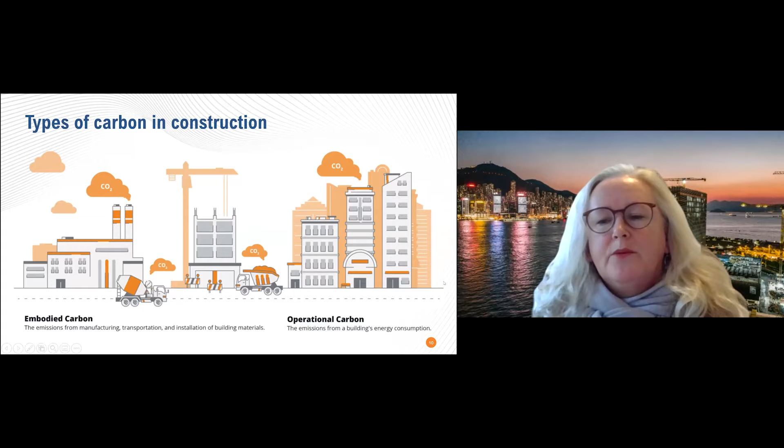And I'm going to talk about two parts of the carbon equation. One is the embodied carbon, which is all the energy and the carbon wrapped up in the materials through raw material extraction, manufacturing, processing. And the other side is the operational carbon, which is probably more familiar for most of you, the energy being consumed in buildings or indeed within infrastructure.

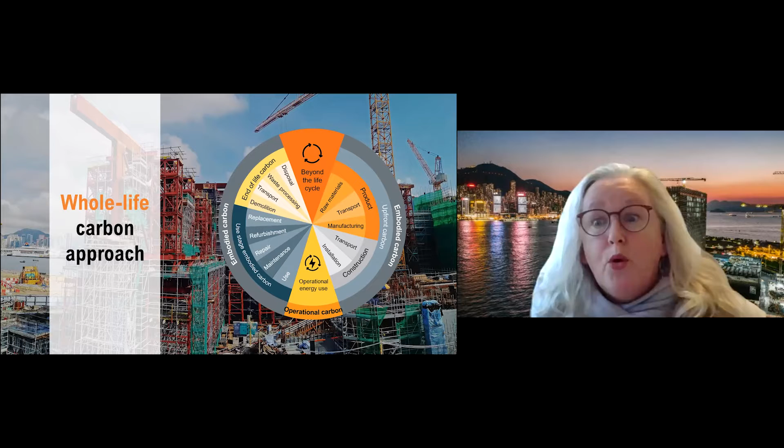And the thinking now is very much about whole life carbon. The outer grey circle you can see there is the embodied carbon piece. And the issue is that traditionally the focus has been a lot on operational carbon, but the grid electricity is decarbonising, and the embodied carbon part is becoming much more important and more of a challenge to decarbonize.

From the construction aspect, we call the first part that we're focusing on in terms of mitigation the upfront carbon, and that is two aspects. If my mouse will work, here we go. We've got the materials embodied carbon, as I mentioned, and the carbon from construction activities. So this is what we're actually doing on site and the energy that we're using in the transport and also the activities on the projects.

A little bit of context then is the World Green Building Council vision for carbon reduction, and they have two milestones. I'll make these a bit bigger. 2030, they expect to see 40% less embodied carbon with significant upfront carbon reductions, and all new buildings must be net zero operational carbon. That's a real challenge for Hong Kong with our very high-rise, high-density development, subtropical climate, and reliance on air conditioning.

For 2050, everything should be net zero carbon, whether it's the embodied carbon or the operational carbon, and that in theory should be new and existing buildings, as well as infrastructure.

And I think there's a lot of discussion on green building operation, but we don't tend to talk too much about the infrastructure side. And from a construction perspective, the embodied carbon wrapped up in infrastructure, things like roads and highways, that's the majority of the carbon that we've got to try and mitigate. So certainly a challenge. So I'm going to talk about it in four aspects. So these are the key players, I'd say, the key groups of players in the construction sector that can influence that upfront carbon. I'll focus obviously more on the contractor because that's what we're doing, but I'll touch a little bit on the other areas.

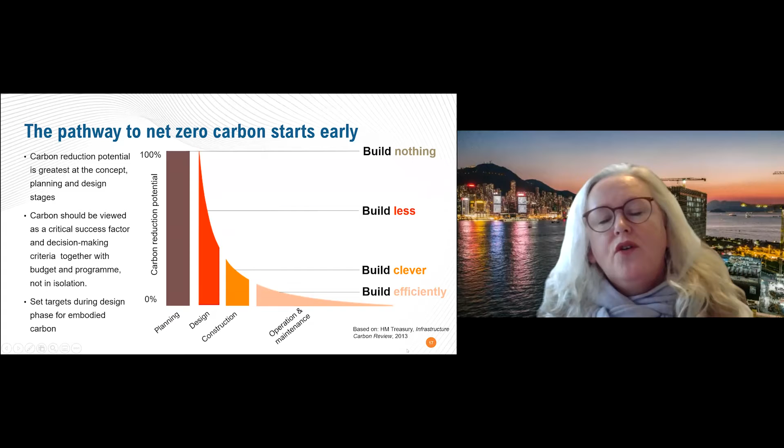And I think this graph is important because it highlights that the biggest opportunities for carbon reduction happen at the very beginning of the project. So at the planning and design stage, you get the greatest potential for carbon reduction. And some countries are setting targets for use during the design stage to try and push down the embodied carbon for projects, and to take a life cycle approach, whole life and embodied carbon thinking. We can't just look at the operational carbon anymore.

And I think some of the clients are already doing this, to integrate low carbon specifications into contract procurement, and to engage with the contractor during the early stages of the project, and even during design. The client can also set the design life, so a longer design life will ultimately reduce the embodied carbon of the overall project, and perhaps specify that the building should be flexible for adaptation, and it should be designed for disassembly so that you can get the maximum use out of the materials for recovery. So these are the roles that

the proponent can play. From a designer's perspective, this is where there's the opportunity for optimizing the design to reduce the amount of materials that are used, and to specify lower carbon materials. You can see here's a couple of pictures. These are void forms for concrete pours to reduce the amount of concrete used, or using, for example, the AAC blocks instead of concrete blocks in walls. And the lighter the structures are, the less foundations we'll need, and this will have a major impact because diesel used in foundations is one of our biggest challenges to reduce the carbon of.

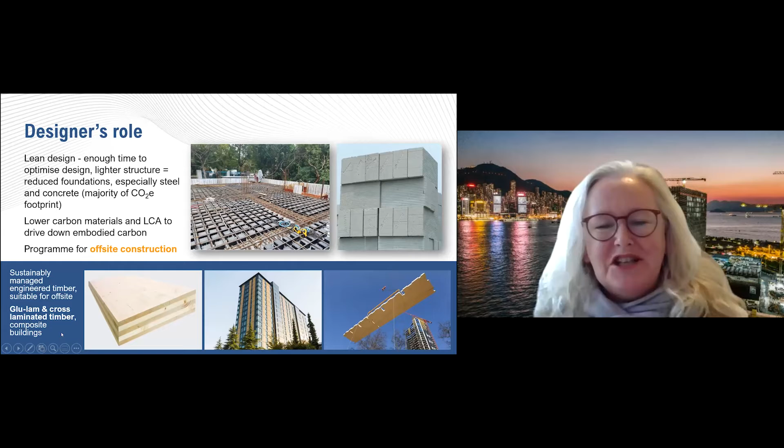Lower part of the picture there, you can see the opportunities for timber use, mass engineered timber, that would be fantastic to see in Hong Kong. Not an easy thing to bring to Hong Kong, but we hope to see this in the future.

And then on to us as the contractor then. What is our role in all of this climate change mitigation, and what have we been doing? So our carbon reduction progress so far has been pretty good. We've been reducing our carbon intensity over the years, but also our absolute carbon has been reducing. And we're in line or ahead of the targets that were set by the Hong Kong Construction Association a number of years ago. But you know, this is really focusing on scope 1 and 2 emissions. And what does that look like for us?

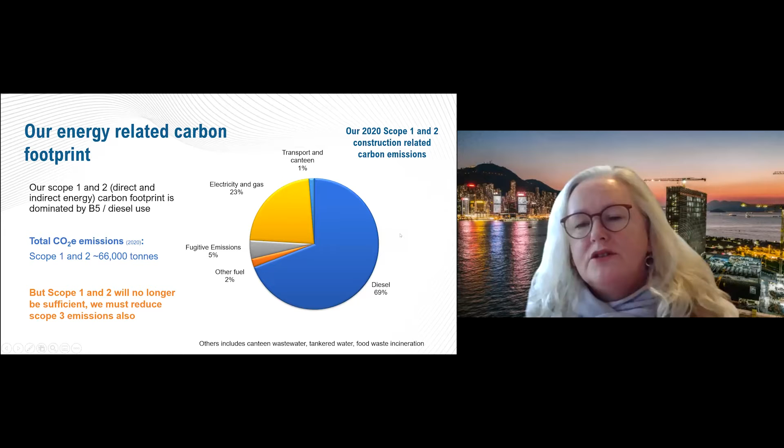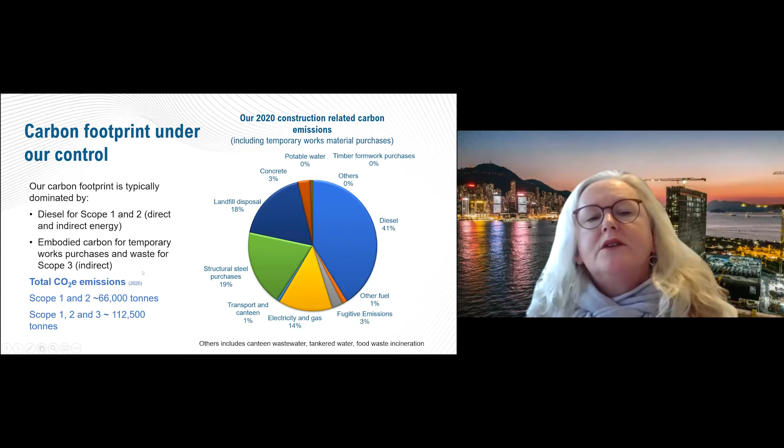We've got to be looking at scope 3, and our starting point is really where we can directly control those scope 3 emissions. So that includes things like waste and water use, but importantly for us, it's the temporary works. So these are the works that we would need to do in order to build the project. We will put up things like formwork or steel struts in an excavation, and then we'll take those away afterwards. And those are the things that we can influence. Then you've got the permanent works. Permanent works is the finished asset, whatever we're building. So it's the embodied carbon for the temporary works that we can potentially more directly control, and that's where we've got to focus our energy.

But the situation is that around 90% of the upfront carbon is in the embodied carbon in the permanent works materials. Our part that we can directly control is only around 10%. So a big challenge for us all to try and tackle that. When it comes to delivering the projects on site for the construction stage, then what do we need to do? Well, we need to work and collaborate both with our clients, project proponents, as well as the designers upstream, and we need to influence our supply chain downstream.

Directly, we need to make sure we're reducing our scope 1 and 2 emissions, so using less or lower carbon energy sources, and then delivering efficiently. So the primary objectives are things like using the technology, using digital twins, digitally rehearsing the delivery of projects, the building of projects, and off-site construction.

Those two things are going to give us a big advantage in terms of making sure that we're not doing rework, making sure that designs are all coordinated, and we're producing them efficiently off-site in factories where we can control the environmental management much more easily. Also, the construction methods. So that was the temporary works I mentioned, and I'll give you some examples of those. Waste and water management, very important, and finally, with our off-site partner factories, is making sure that they are managing their environmental impacts and using low carbon energy, these kinds of things.

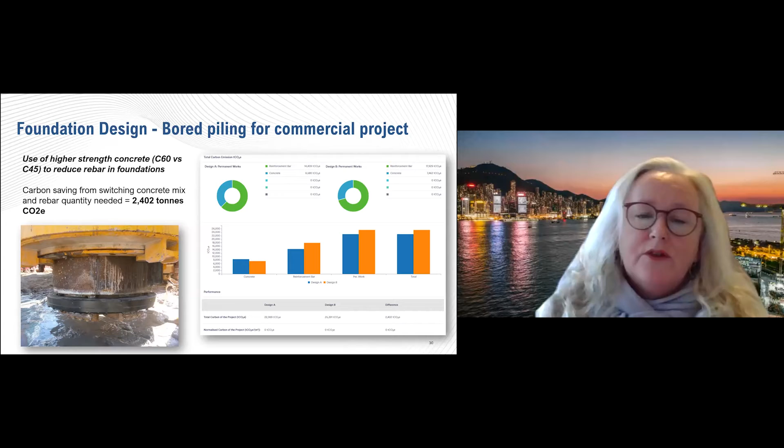We can do alternative design for foundations, and we use the CIC, the Construction Industry Council's carbon assessment tool to optimize things like the concrete mixes. So we use a higher strength concrete and reduce the amount of reinforcement bars that we're using. And that can give us carbon reductions for embodied carbon.

And another example of how we've changed the method for construction. Here we're doing a bridge, and in order to build those foundations, we've had to excavate some of the marine sediment. And the idea was that marine sediment would have been disposed of in a marine site. We've chosen to make sure we stabilize and reuse that material directly on site. And not only to stabilize it, we also are reducing the amount of cement that's needed in order to do that. So yeah, nearly 2,000 tons of embodied carbon emissions saved there to change the treatment method and trial lower cement mixes. Hope I'm not getting too technical.

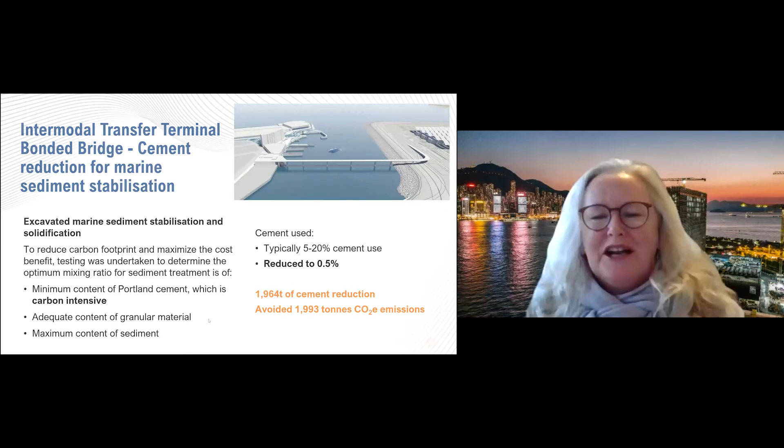We still rely on timber, particularly for formwork when it's an untypical construction, things like a podium for a high-rise residential building. And when we do use this, we make sure that it is sustainably certified. Obviously, this also can reduce the carbon footprint.

And I mentioned this carbon assessment tool. So this is a free tool that designers can use, that contractors can use, to assess different design options when it comes to the materials. And this is all updated with the most relevant embodied carbon emission factors for different types of materials used in the construction sector. And it also allows contractors to record their upfront carbon emissions, the construction part of that upfront carbon. So a great tool there. We actually helped advise on that one.

And then we come to the BIM and offsite, so the building information modeling, breaking things down and coordinating them for shop drawings. You can see for the factories. This is a typical example of what we've been seeing in the industry, these modular integrated construction units. Unfortunately, these are at Penny's Bay, an unfortunate necessity.

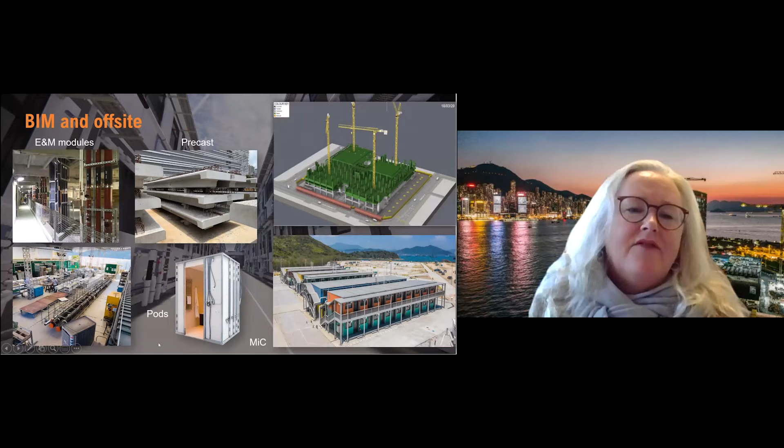We have, in terms of offsite construction, lots of different methods of doing this. We started off mainly with the E&M module. So this is the Murray Hotel, and we've been using these kinds of things in...

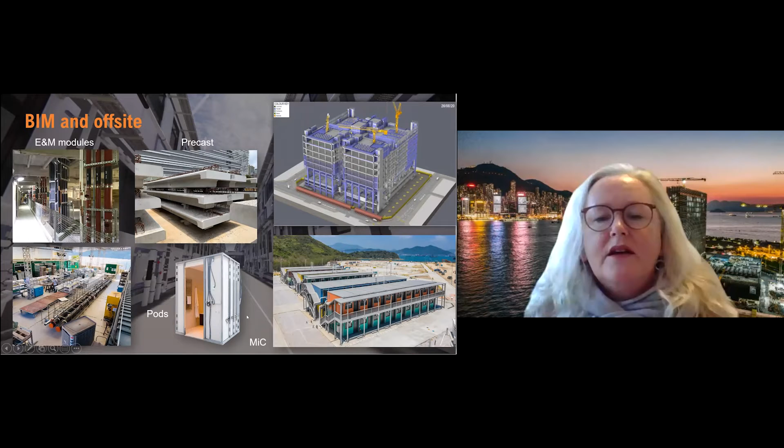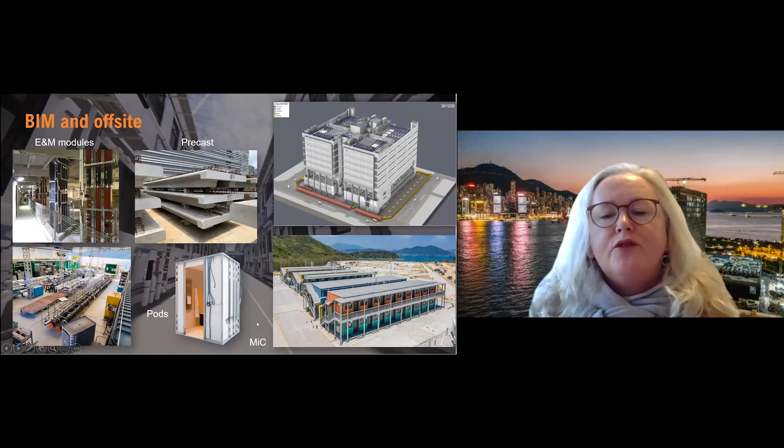Data centers, precast slabs in the project shown here for the science park. There could be bathroom pods. We haven't really seen these being brought into Hong Kong very much yet, but bathroom pods, kitchen pods, toilets we are doing. And then, the full-blown modular MIC projects.

They're going to have a big improvement on things like the energy used on site, waste and traffic movements. And even once we include the factory emissions as well, we're still going to see reductions.

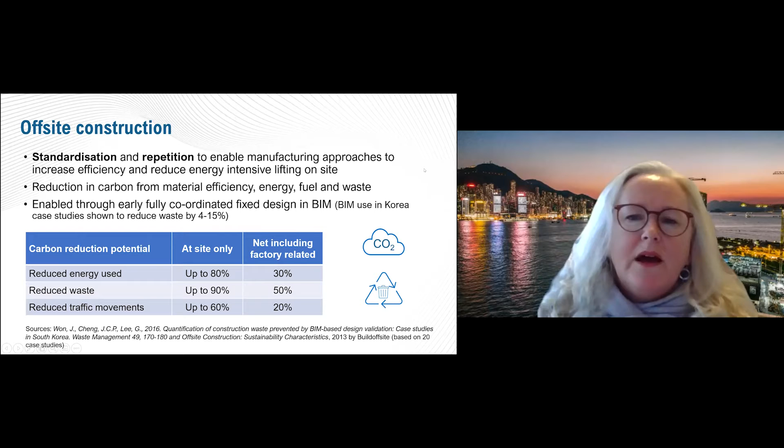And BIM also saving waste. There's not a huge amount of research out there, but based on our own experience at Penny's Bay, we compared this construction against other residential projects we've done. Not very typical, but anyway, even when we were using diesel, there was no electricity on this site. We used diesel for the project and got nearly 40% carbon intensity savings, good waste savings, and good water savings as well. So real opportunities there in terms of using MIC.

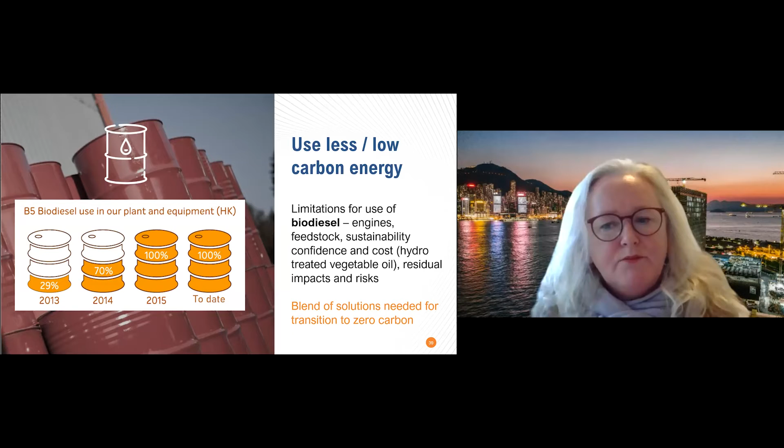Moving on to the energy part, scope 1 and scope 2, we've been using B5 biodiesel for a number of years on all of our plant and equipment. But there are limitations. There's a new generation of biofuels which we will be looking at. Some challenges there, but we think it's probably going to have to be part of the solution in the interim.

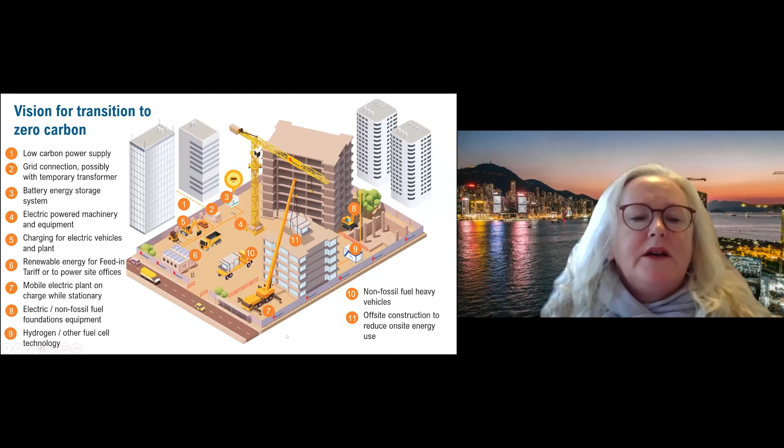Overall, there's going to be a blend of solutions needed, and this is our sort of vision. I'll take you through some of these aspects that we've already started doing in some areas.

The first thing is the low carbon supply, and it's great to see the government committing to decarbonising this energy supply. So the more we can use in terms of electricity, or the more we can transition to electricity, the better. That then enables us to connect to the grid and use things like battery energy storage systems.

I think Sino mentioned this earlier as well. So we were one of the pioneers for this, and we helped Amped Energy to develop their solution. This can then be used particularly for plant that has very intermittent power demand.

We can also use that electricity for charging EVs. We've started using EVs on projects, and we have some smaller things like forklifts, EV forklifts, but in future we're going to expect to see smaller plant becoming electric.

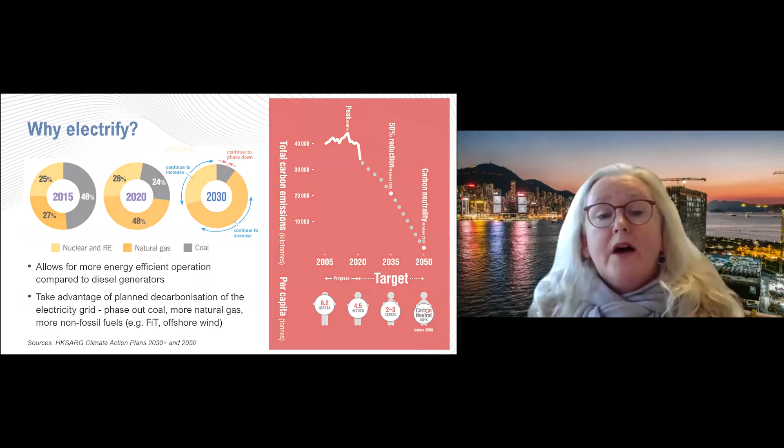And why do we want to use the electricity supply? As I mentioned, we know the electricity supply is decarbonising. And for us, there are other benefits, particularly for health. We know that diesel is not particularly nice, and we've got noise and risk issues as well. So all of these things point towards electrification from the beginning.

But the challenge is that at the moment, we typically wait around 6 months before we get power connection. Some of our clients have applied for it early, but in most cases there's not normally sufficient power on site, and so we can't adopt that electric plant.

The government has also recognised this, and they have now issued a circular about government works projects having to have a small supply at the beginning, but what about the private sector? So we've engaged with the Business Environment Council to develop something called the Power Up Coalition, to try and encourage that early electrification of construction sites.

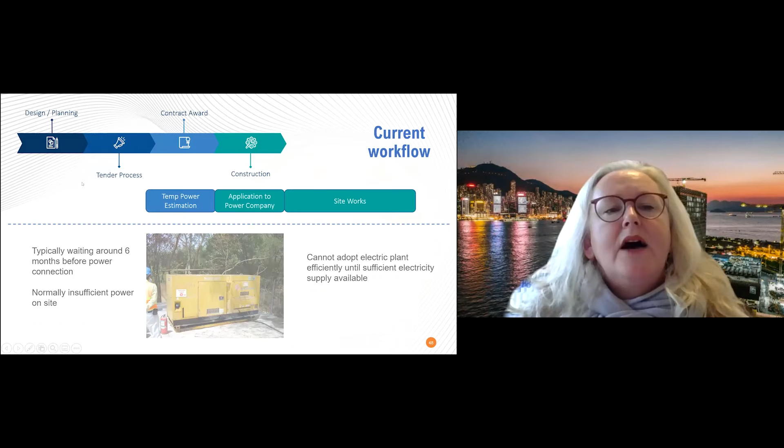And we've developed a forecasting tool for helping developers and their teams to do that early application. So we're moving the application much earlier in the project, which means that once we start construction, we have electricity available on site. And in future, that's going to allow us to bring in some of the heavier plant and get sufficient power as it starts to convert to electric power.

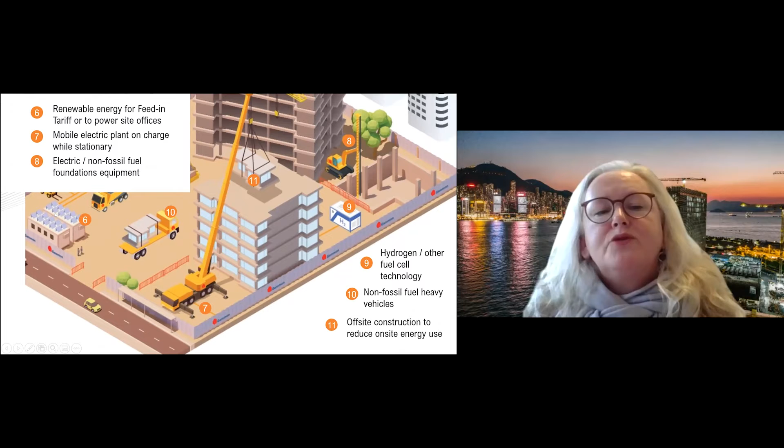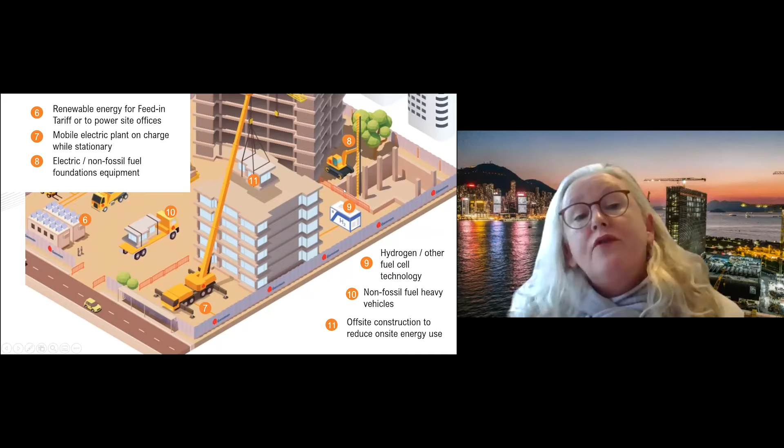But I don't think it's only going to be electricity. We're also trying to use some renewable energy on our projects, and I'll give you an example of that. In future, we're going to have a mix of solutions: mobile plant on charge, some non-fossil fuel foundations equipment, hydrogen is likely to be in the mix particularly for heavy vehicles used in bringing in MIC units or removing waste, and then off-site construction, as we've mentioned before, is already the way forward.

We've heard quite a lot about net zero targets and science-based targets. We're not quite there yet. We are committed to a 50% reduction by 2035 of our scope 1 and 2, and alignment with the government ambition for carbon neutrality by 2050. For our scope 3 emissions, we will be developing a detailed climate action plan, and we hope to commit to the Science Based Targets Initiative this year.

We're also going through the TCFD recommendations, and we'll be including that in our sustainability report this year, which should be out in a couple of months.

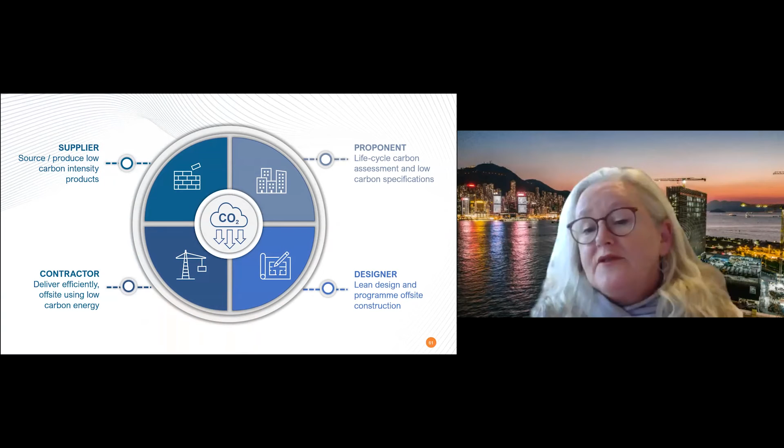From a proponent perspective, we'd love to see more life cycle carbon assessment and low carbon specifications, and that will really help to drive down embodied carbon from the outset. From the designer and from the government departments supporting those designs, we'd love to see lean design, and to make sure that the off-site construction is being designed in during the design stage and programmed. For us as a contractor, we've got to deliver efficiently. We've got to reduce our energy use, and we've got to deliver as much as possible off-site.

And finally, suppliers and their role in terms of producing lower carbon intensity products. And as a contractor, we've got to work with those suppliers. And I think that's the story, is that everybody needs to be working together to try and reduce carbon emissions and to mitigate climate change.